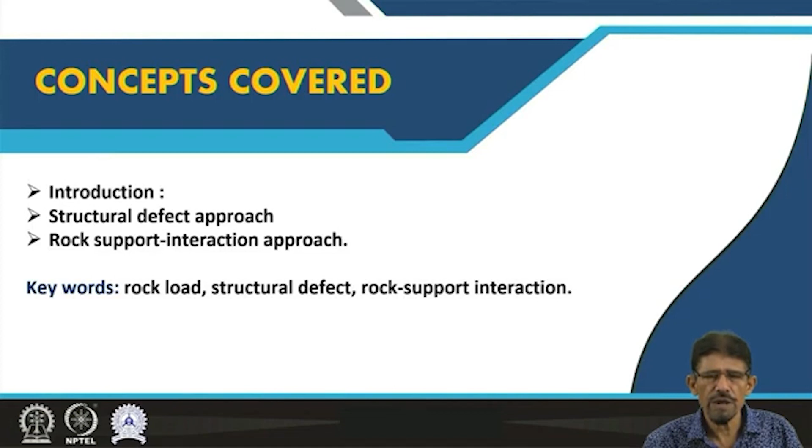Friends, unified approach indicates the integration of all the previously discussed approaches for determination of rock load or ground pressure. However, this concept disregards the empirical and semi-empirical or semi-theoretical approach. This concept integrates the structural defect approach or block theory and rock support interaction approach in detail for development of a concept under the heading unified approach.

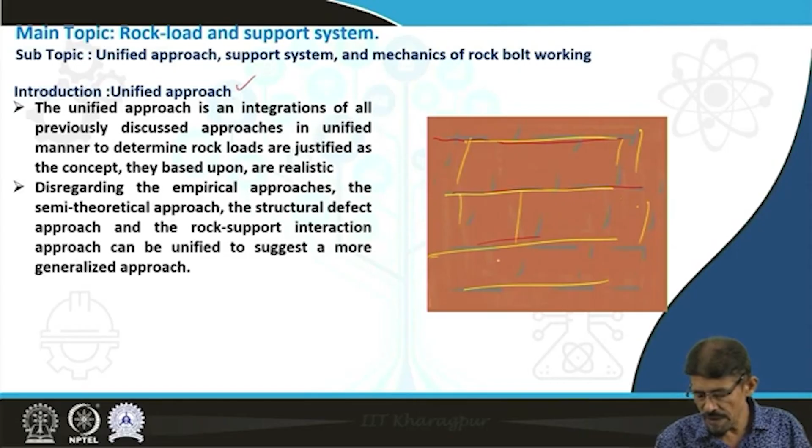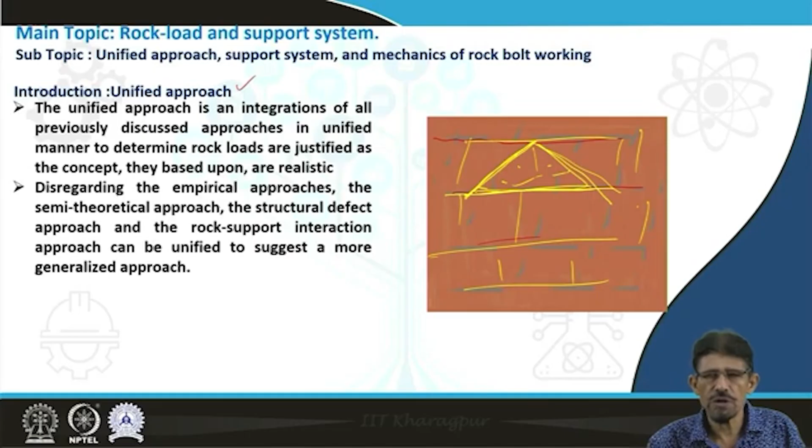Friends, as you know, the ground is made up of different discontinuities and others. As for structural defects, we have discussed there is a formation of blocks due to intersection of the joints along with the surface of opening, or due to intersection of different joints. The movement of blocks is responsible for deformation of the whole ground, resulting in failure of the developed structure, existing structure and underground space. This unified approach suggests a more generalized form, and in this generalized form we are going to apply the structural defect approach and rock support interaction approach.

As per the concept of unified approach, it is proposed that there is a formation of three zones. Plastic zone, the loosening zone and zone due to structural defect can occur about the opening. Here is the formation of a zone due to structural defect, formed by intersection of joints along with the surface of this opening. Then along this there is a formation of loosening zone and formation of plastic zone and formation of some partially affected zone, etc. about the opening.

The condition for the appearance of such zones: the zones due to structural defects can occur when the rock strata has one joint set or more joint sets, at least one of which is exposed on the surface of opening. Otherwise, this concept is not going to accept a distribution of joints which is diverse in nature and not going to intersect each other and not exposed on the surface.

The loosening zone can occur when the initial in situ stress ratio and the geometry of effective opening shape, defined by the geometrical orientation of structural defect formed by intersection of joint and surface of opening, are such that tensile stress regions about the opening are to occur. The loosening zone is associated with the zone caused by tensile stresses which the rock mass cannot sustain and becomes free from the true ground stress field about the opening.

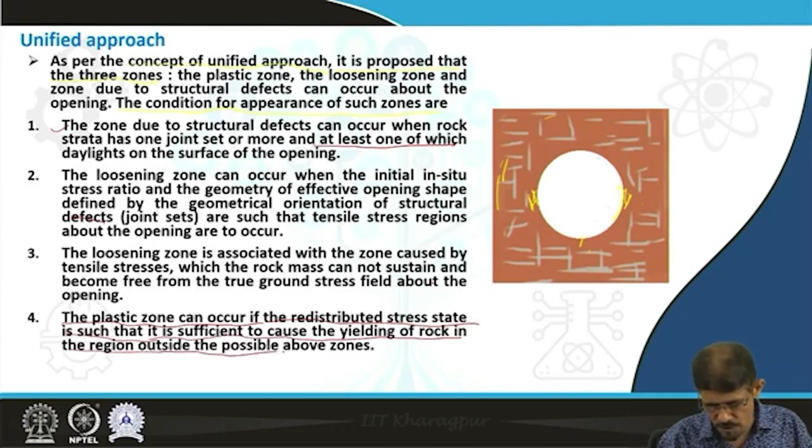Friends, we know that the tensile strength of the rock mass is very less in comparison to compressive and shear strength of rock mass or rock. In case of tensile stress, in normal condition the rock is going to show a reduction of strength, on average 1 by 8 of compressive strength. If compressive strength is 1, then the tensile strength should be 1 by 8. The plastic zone can occur if the redistributed stress state is such that it is sufficient to cause the yielding of rock in the region outside the possible loosening zone.

Here we can see when we are going to create this opening, then due to presence of these structural defects caused by joints J1 and J2, J1, there is a formation of block due to this structural defect concept. Due to movement of this block toward the opening, or into the opening, there is a loosening of strata as per structural defect approach we have already discussed. When this block is going to move, then another block lying above is going to take the place of this movement-induced open space. Similarly here, due to movement of these blocks there is a formation of loosening zone.

So as per this concept, this is the zone due to structural defect. Above this structural defect there is a formation of loosening zone, and this loosening zone occurs under the influence of tensile stresses. This loosening zone is going to influence the zones lying above it, resulting in a plastic flow zone. This is the plastic flow zone, lying above the loosening zone, and the loosening zone covers the structural defect zone.

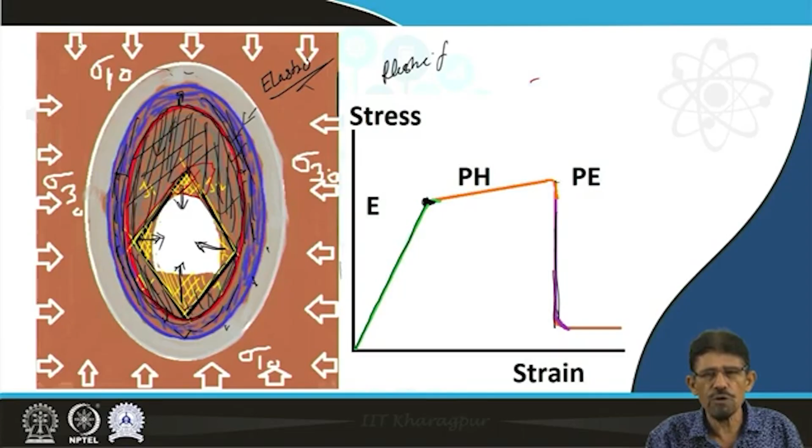Then there is the plastic hardening zone, then the plastic flow zone from the upper side, and then the loosening zone, and then the structural defect zone. In this way, the ground is going to provide the support pressure on the support system. If the support system is able to sustain, then we are going to protect the opening, otherwise we are going to see the result of failure of the opening.

As far as the support system is concerned, to protect such a created opening, we have already calculated rock load or ground pressure through different approaches: empirical approach, semi-empirical approach, structural defect approach, rock support interaction approach, and finally the integrated approach, mainly involving the structural defect approach and the rock support interaction approach following Mohr-Coulomb's criteria. To counter this type of rock load or ground pressure coming on the roof and the walls of the created opening, we are going to utilize a support system.

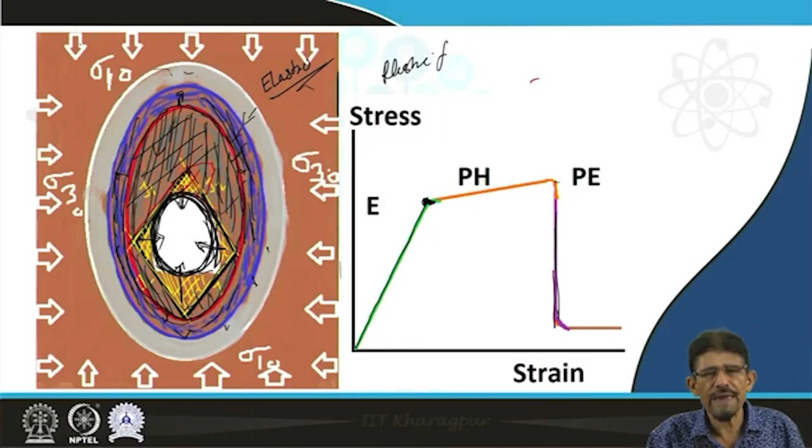Although we have a variety of support systems starting from timber to steel girders to wire mesh to simple concrete support, brick support, masonry support. In the case of underground openings, in major cases we commonly utilize the following support members: steel ribs, steel liners, concrete liners, shotcrete, rock bolts, and others also, wire mesh, masonry support, girders, timber support, etc.

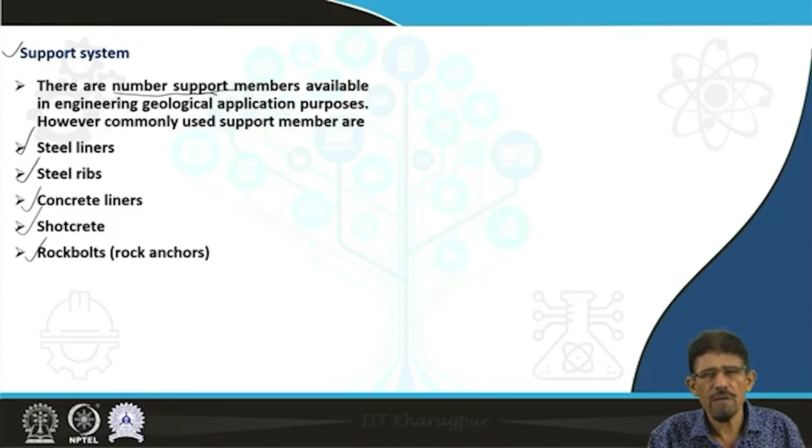Rock bolts are very simple, cheap and easy to install, widely utilized as a support system in a variety of underground structures and surface structures also. They transfer the load from the unstable interior to the stable zone and enhance the strength of the damaged rock.

Shotcreting. Shotcrete is mortar or concrete. It is a mixture of fine sand, cement and water as a mortar, or aggregate, cement and water as a concrete. The quick setting concrete is sprayed onto the bare rock immediately after excavation and commonly used as the primary support in the tunnel, not a final support.

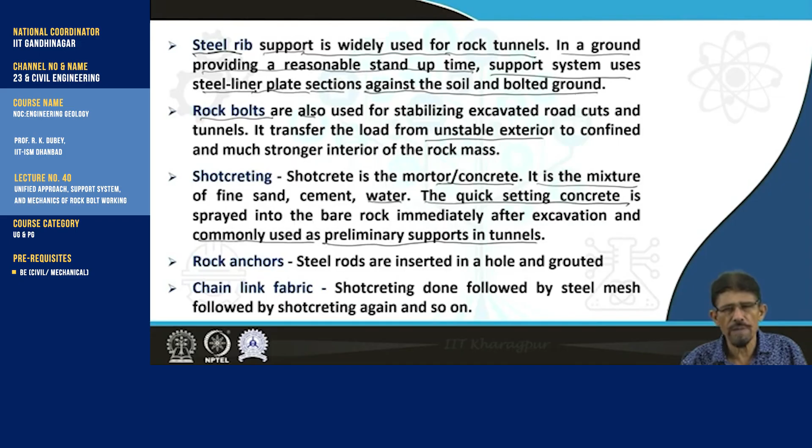Rock anchors are steel rods of extended length, longer than the bolt, and utilized for supporting by inserting such steel rods in holes and fixing them in the stable zone to bear the load of the damage zone and provide support to the created opening. However, chain link fabrics are also utilized, that is shotcreting followed by steel mesh followed by shotcreting again, and so on.

Besides this we have other types of support systems, and now in technology we are day by day improving the support system for different types of ground conditions, particularly in view of squeezing and swelling ground, where we see a continuous increment in rock load.

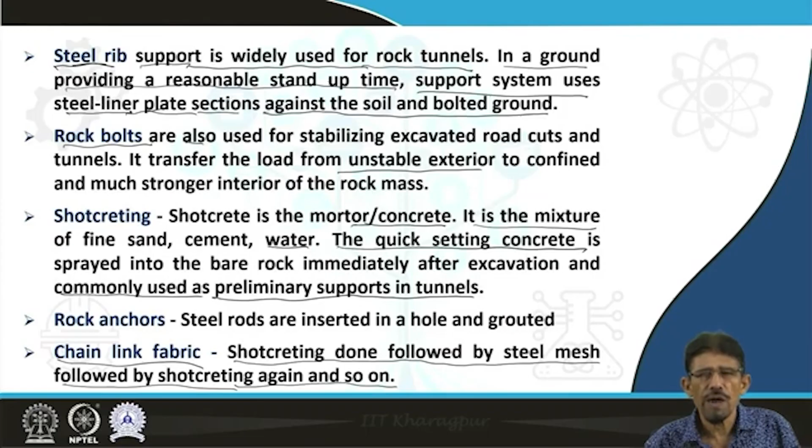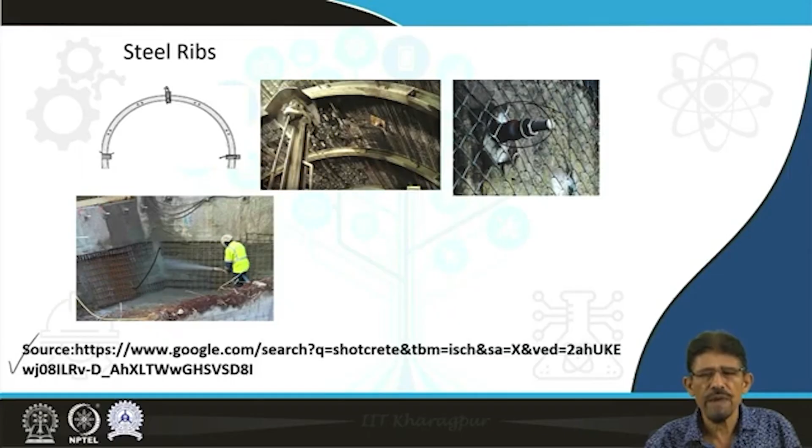You can see the source. Friends, regarding the rock bolts, how the rock bolts work to support a created underground opening. Here we are going to describe in brief the calculation of the number of bolts and the length of the bolt.

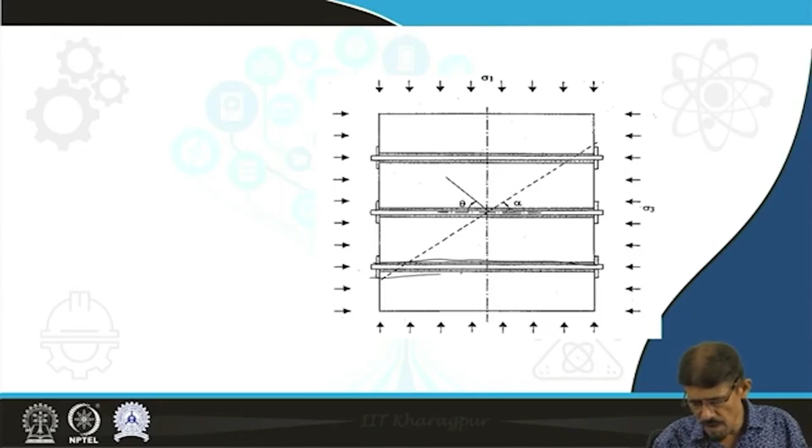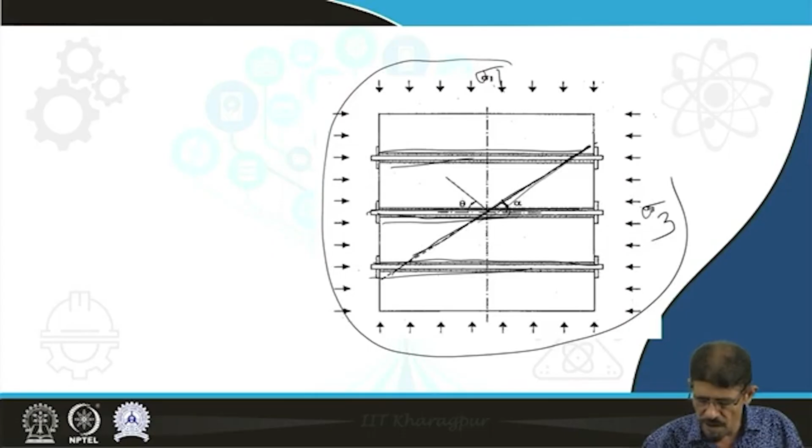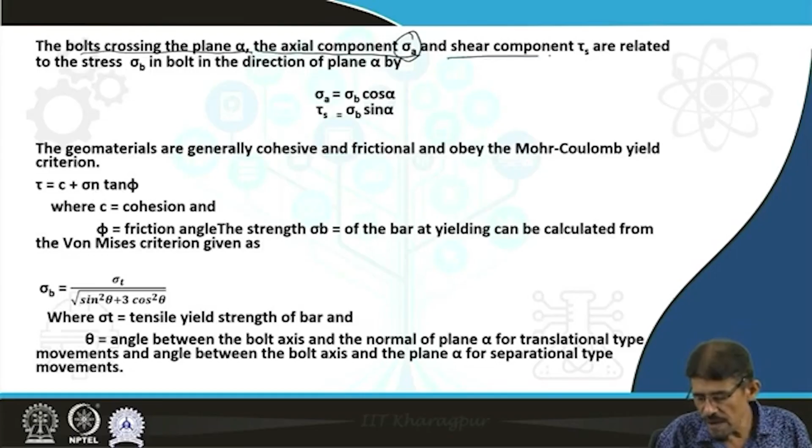You see here the number of rock bolts we are going to insert under the confinement, where sigma 1 is the maximum principal stress and sigma 3 the minimum principal stress distributed around this strata. If this rod makes some angle alpha, where the normal to this zone is theta, then we calculate the bolt crossing the plane alpha. The axial component sigma A and shear component tau S are related to the stresses developed in the bolt, and sigma B represents the stress developed in the bolt.

In this way we can calculate the axial component sigma A as sigma B cos alpha, and the shear component tau S as sigma B sin alpha. Following the concept given by the Mohr-Coulomb criterion, we know that the shear strength of any system is simply the cohesive strength plus the normal stress times the tangent of the angle of internal friction. The strength developed in the bolt, B for bolt, of the bar at yielding can be calculated by the von Mises criterion: sigma B is equal to sigma T divided by the square root of sin square theta plus 3 cos square theta.

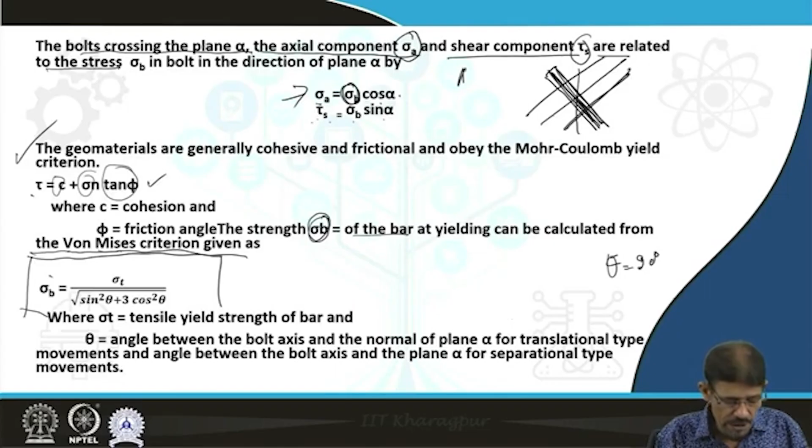One thing I try to explain here is the maximum stress developed in the bolt. If we put theta equal to 90, then this value of sigma B we get maximum, and the bolt can bear the maximum stress; if we put theta equal to 0, then sigma B we get minimum. Therefore generally we insert the bolt perpendicular to the discontinuity. If the discontinuity is like this, then as per rule we insert it normal to the extension of the discontinuity, not inclined, because if we put theta as 90 as a normal, then we get maximum sigma B, which is the stress in the bolt. It means the load coming on the discontinuous material is going to be sustained by the bolt.

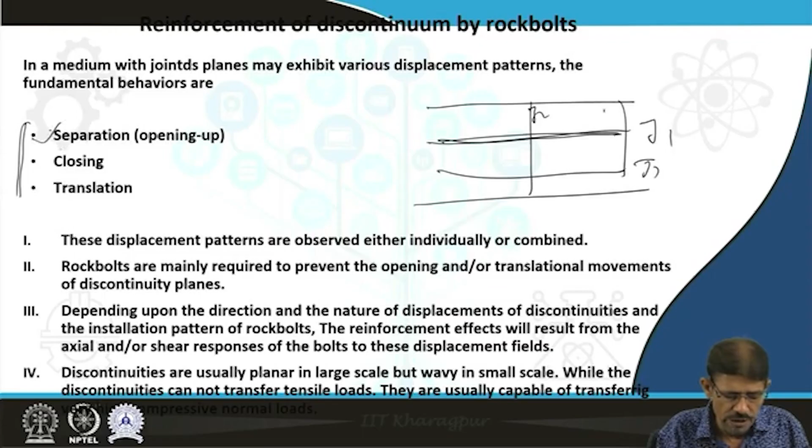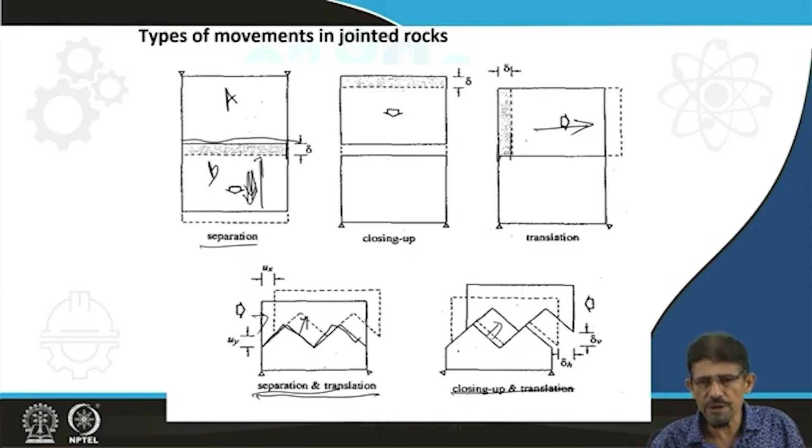Same thing. If we look at any discontinuous or jointed rock mass, then due to the presence of joints J1, J2 and others, there are three types of movement we can encounter. One is separation, another is closing, another is translation. Suppose this is the joint plane, block A, block B. If block B is moving down, then there is a separation. If the blocks are moving toward each other, then there is a closing. And translation is when this block is moving, leaving some space. With this type of joint profile, when we displace it, we get separation and translation. Closing also shows some linear closing and some translational movement.

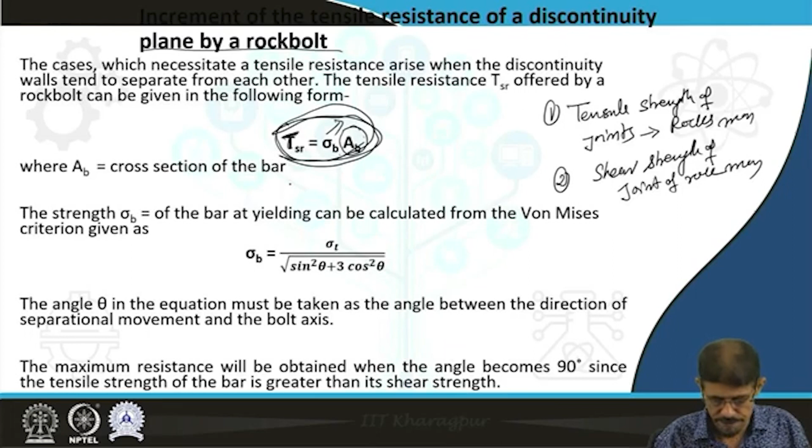Following this, the bolt is going to enhance two components. One is the tensile strength of joints, meaning the jointed rock or rock mass. Another is the shear strength of joints or rock mass. Following different criteria, the enhancement in tensile strength of the joint can be formulated as sigma B, the stress developed in the bolt, multiplied by the cross-sectional area of the bolt. In this way we get the increment in tensile strength of the joint, where sigma B, as we have already discussed, can be calculated by putting this value.

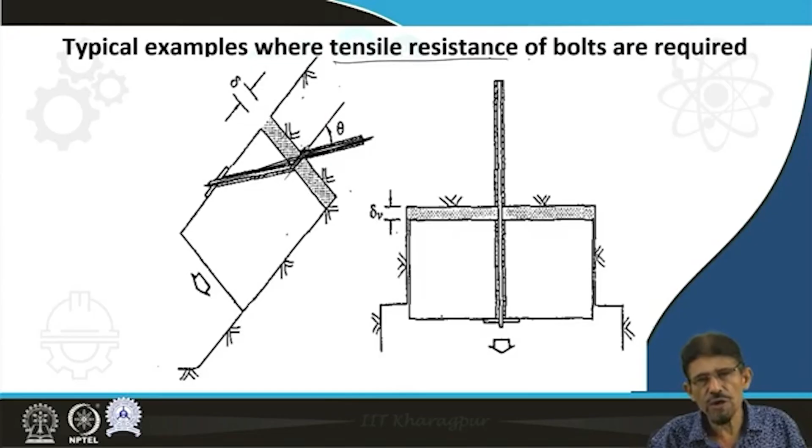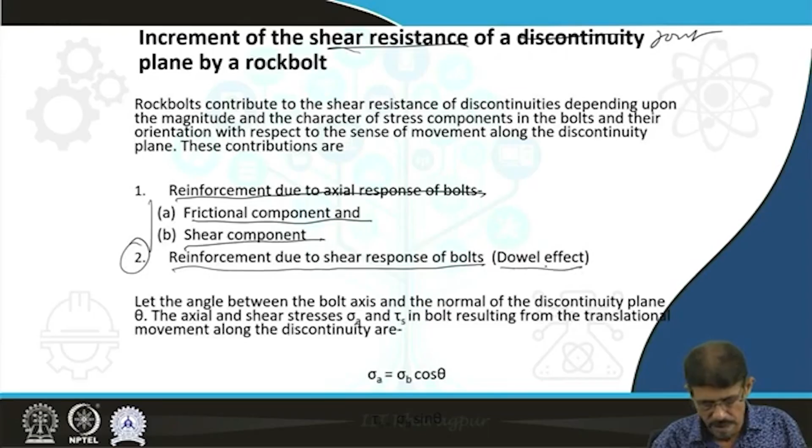You can see here that when we insert this bolt at an incline, then due to separation there is a tilting of this and it does not show any resistance. So the tensile strength we can calculate. However, for the shear resistance due to the joint, the reinforcement due to the axial response of the bolt is responsible, in the form of a frictional component and shear component, and another reinforcement is due to the shear response of the bolt, that is also known as the dowel effect. So in brief, here we are talking about the axial response. We can see the development of the normal stress and shear stress by simply the number of bolts times the stress developed in axial response of the bolt.

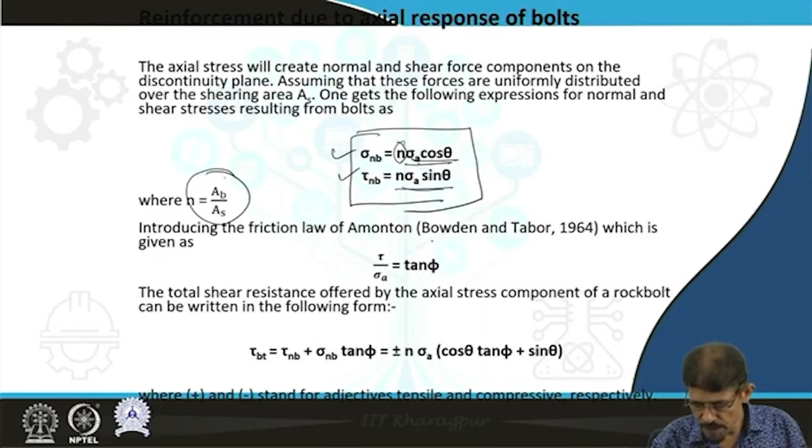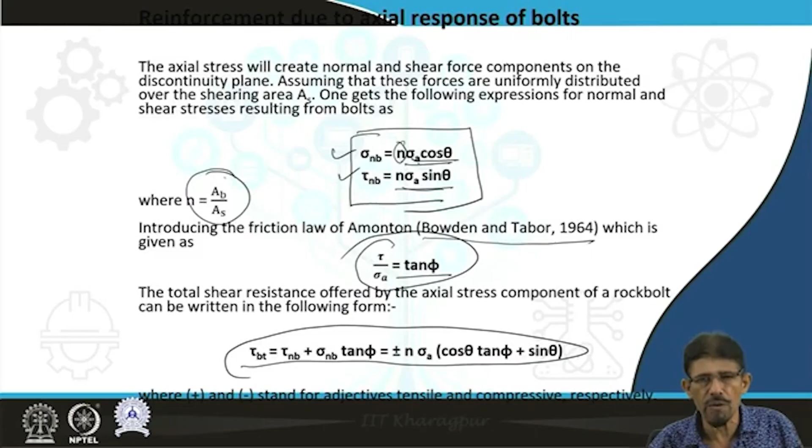The N can be calculated as the ratio of AB by AS, and following the Amonton law given by Bowden and Tabor in 1964, where tau by sigma A is tan phi, finally we calculate the total resistance offered by the rock bolt, where the shear response of the bolt can be calculated by applying tau Rs equal to tau S cos theta. The shear response contribution should always be taken into account, and the shear response of a mechanically anchored rock bolt comes into existence after a certain amount of displacement takes place, since the space between the bar and borehole is more.

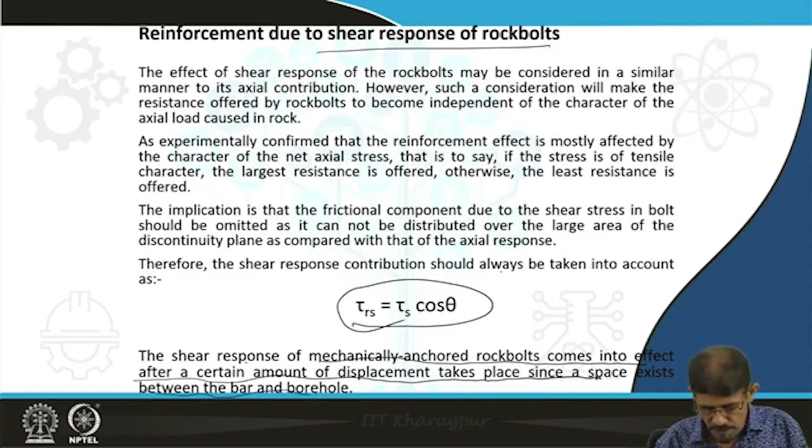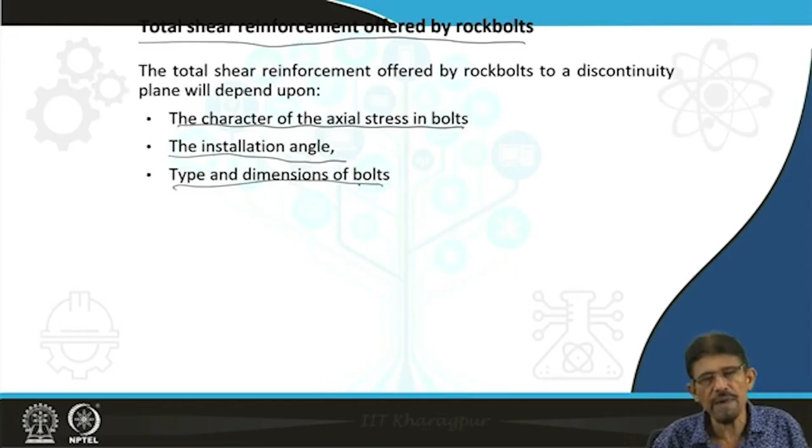The total shear response of rock bolts, along with the tensile response, depends on the character of axial stress in the bolt, the installation angle, and the type and dimension of bolts. Now we are able to calculate the number of bolts by applying this concept. N is equal to Q by SF, where Q is a function of

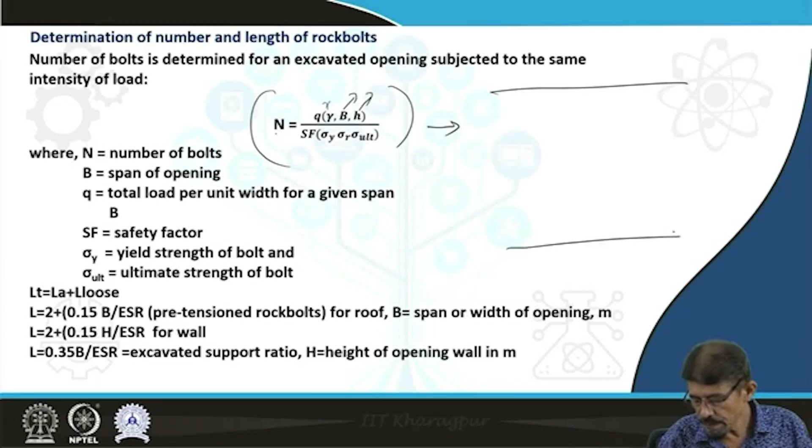unit weight of rock, then the span of opening, then the height of opening. If we are going to create this type of opening, or simply a rectangular opening will be more suitable to explain, we are going to create this opening, then there is a development of loosening zone. We are going to insert bolts to suspend this type of rock, by fixing this bolt in the intact zone.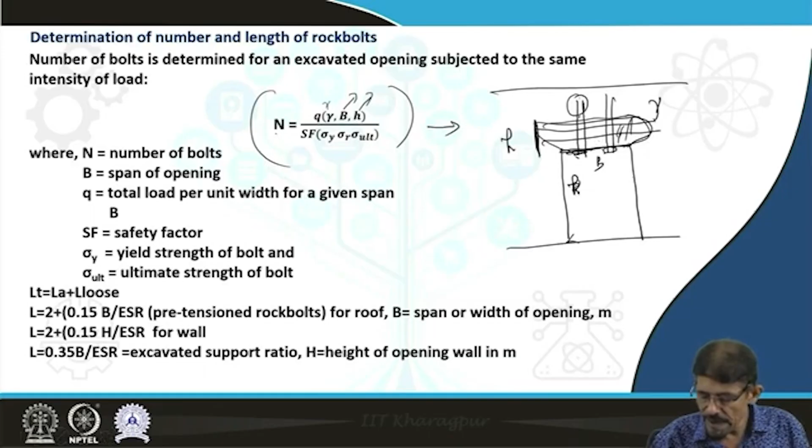So how many bolts are required to suspend this type of detached mass of the detached zone? We can calculate based on the span of opening, this B. This H is the height of loosening zone, and this gamma is the unit weight of this material. Then this sigma y is the yield strength of bolt, or yield ultimate strength of bolt.

In this way we can calculate the number of bolts by determining the Q value, and this Q value is a function of unit weight of rock, then width of span, and the height of the loosening zone or damage zone, which we are going to restore in its original position. In this way we are going to provide the support by using rock bolts.

And why are we going to use this perpendicular? Because when we put theta as 90 degrees, we get the maximum tensile resistance borne by this, and this becomes successful given sufficient strength of the intact zone, the yield strength of the steel bar, and the loosening of the friction and others.

In addition to this, we are going to calculate the length of bolt. You can see the length of bolt should be more than this loosening zone. So therefore this part we are going to divide into two zones. This is the length of intact zone and this is the length of loosening zone. So these two we are going to add: L_A plus L_loose.

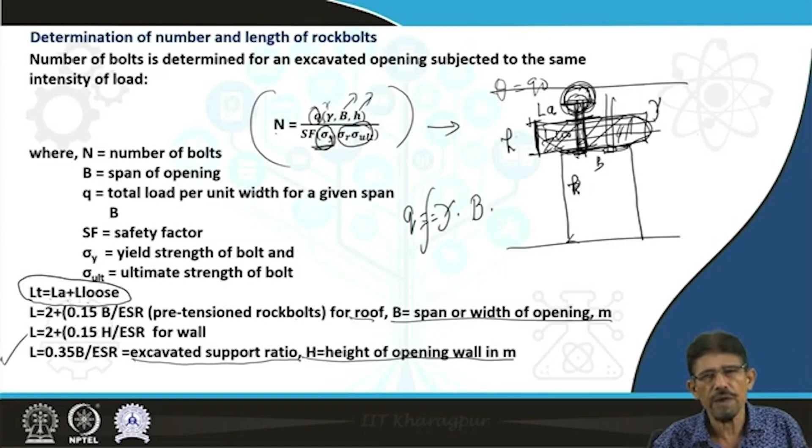Here we are going to conclude that the unified approach principally involves the structural defect and rock support interaction approach. According to this concept, there is a formation of different zones, namely the zone formed by structural defect, loosening zone, then plastic flow zone, then the plastic hardening zone, and ultimately last we have the elastic zone, that is our original ground. It indicates that the elastic zone is the boundary where there is no influence of the excavation induced stresses.

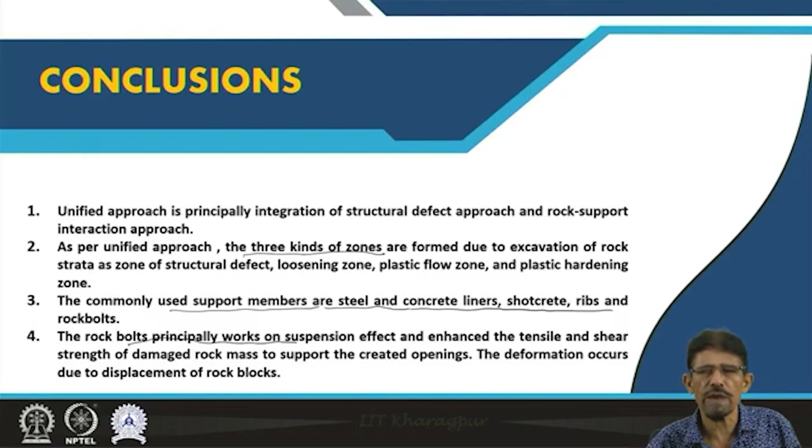Dear friends, in this class we have elaborated on the concept of the structural defect approach and the unified approach and rock support in an integrated manner, then how the rock bolt enhances the tensile resistance and shear resistance of this discontinuous media or rock mass present in the damage zone caused by excavation induced stresses. And then we have the concept regarding the calculation of number of bolts and length of bolt to support a created opening or some subsurface structure. Thank you very much.